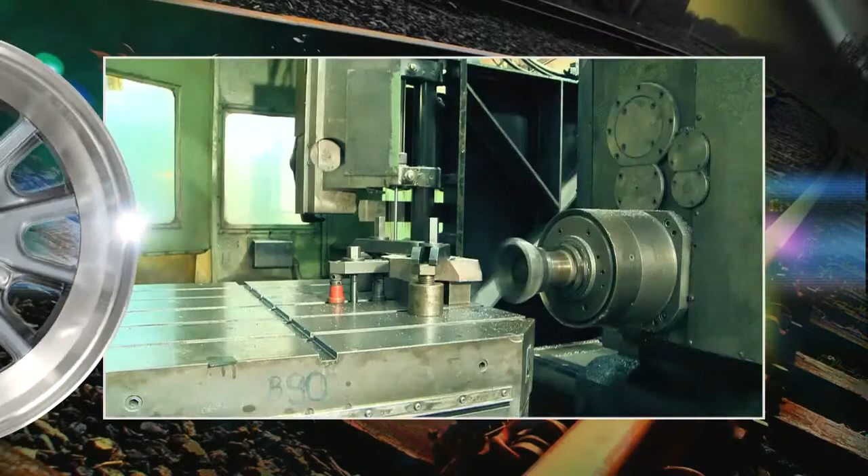SAN Engineering was started by Suri and Nair, two people who promoted the company. It started way back in the 1970s, initially manufacturing small locomotives, then gradually graduating into making larger locomotives.

We are one of the largest manufacturers of hydraulic locomotives in India, especially in the shunting range. We make up to 2,600 horsepower, producing diesel hydraulic and diesel electric locomotives.

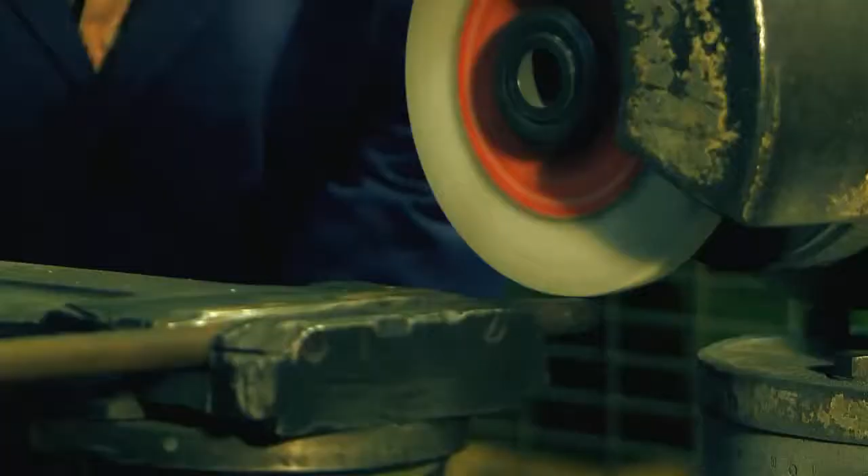We also have a gearbox division which makes gearboxes. Basically, engineering has been our strength, because a locomotive, though it looks robust and simple, actually has a lot of technology built into it.

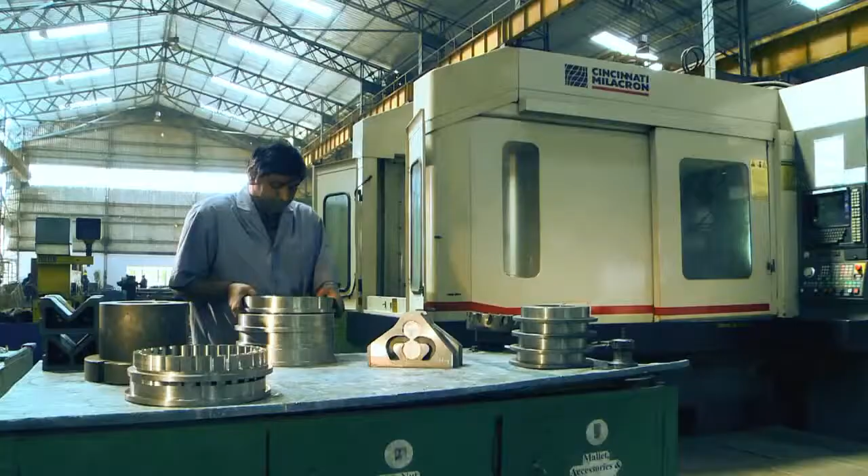SAN Engineering uses Siemens PLM software for the design part, which is then translated into manufacturing drawings. These drawings go through the process, and we have very good CNC machines for manufacturing the parts, which are then assembled. We have a very good quality system in place where the products are inspected before the locomotive is made.

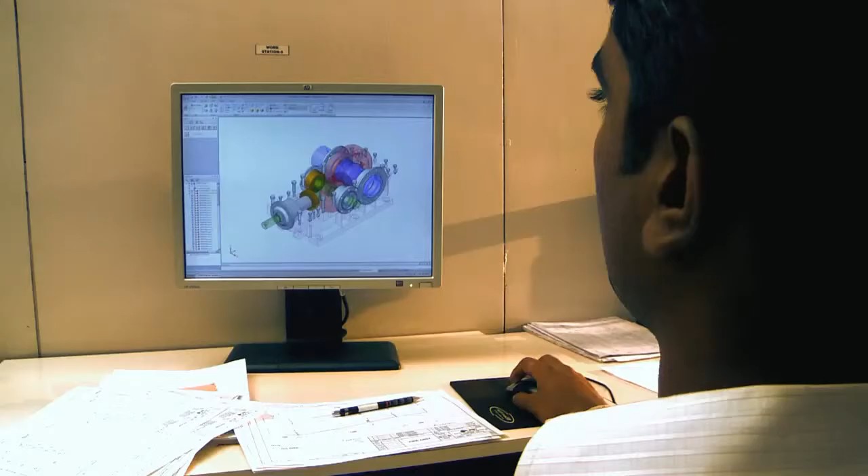At SAN Engineering we were on 2D for quite a long time, and we had issues like not being able to visualize the product or visualize where interferences were occurring. With that, we did an evaluation of many software options.

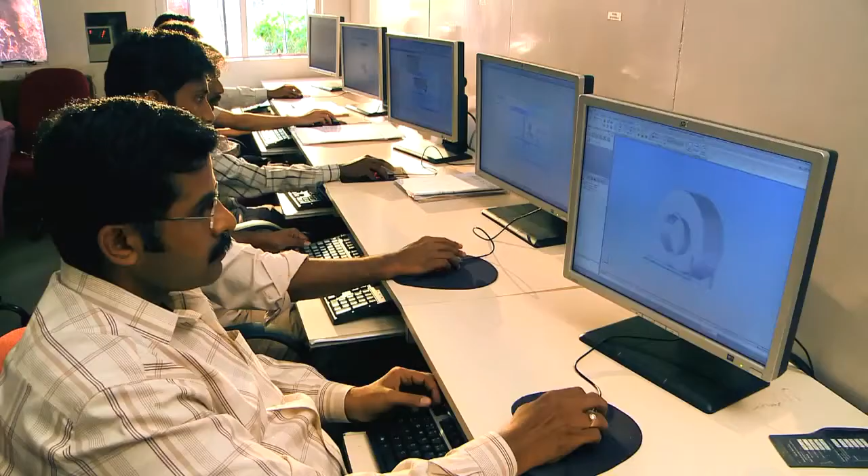We found Solid Edge has an edge because it has an integrated suite of software, which made us select it. The PLM software gives a great advantage to the designer—he is able to see the products, assemble them, and make sure he doesn't make any mistakes. So productivity is enhanced, manufacturing becomes easier, and it becomes a fit-and-forget assembly. We get a distinct advantage on the productivity side.

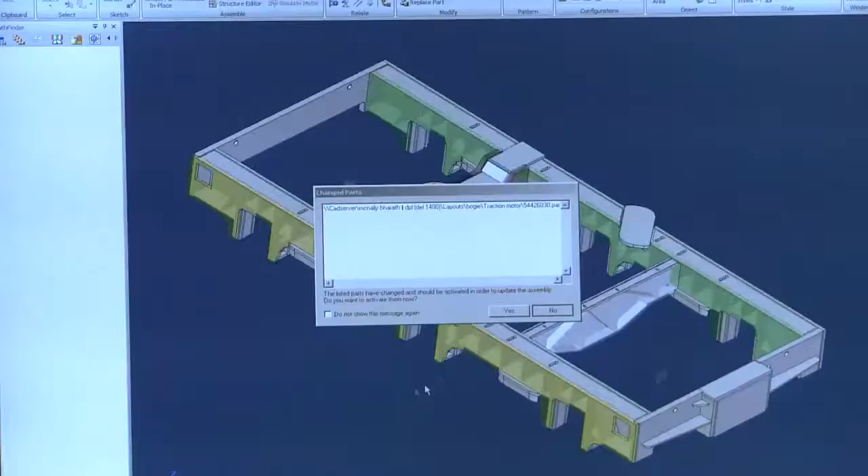We were initially trained by the reseller, for a brief period. We had to create standard templates and a standard design method, and now it's quite easy. All our engineers are well trained, and even newcomers learn hands-on.

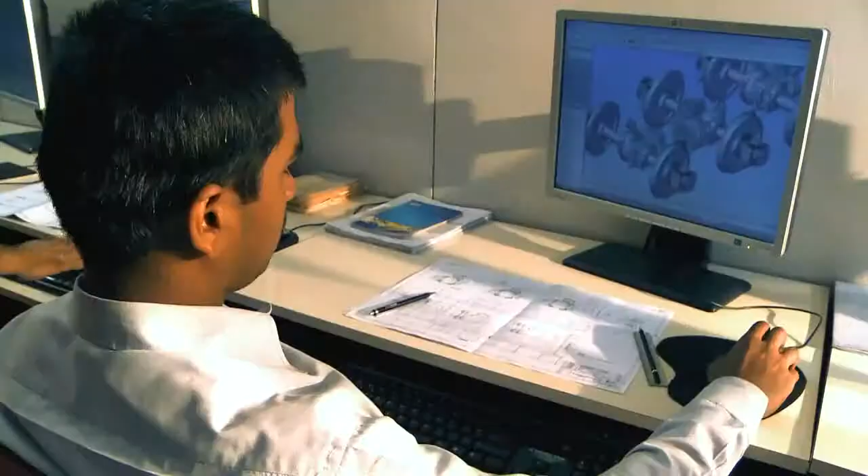Solid Edge synchronous technology today has adjustable parts and adjustable assemblies, and especially it has no history. This makes it much easier for revisions and modifications, which makes it ideal for designers.

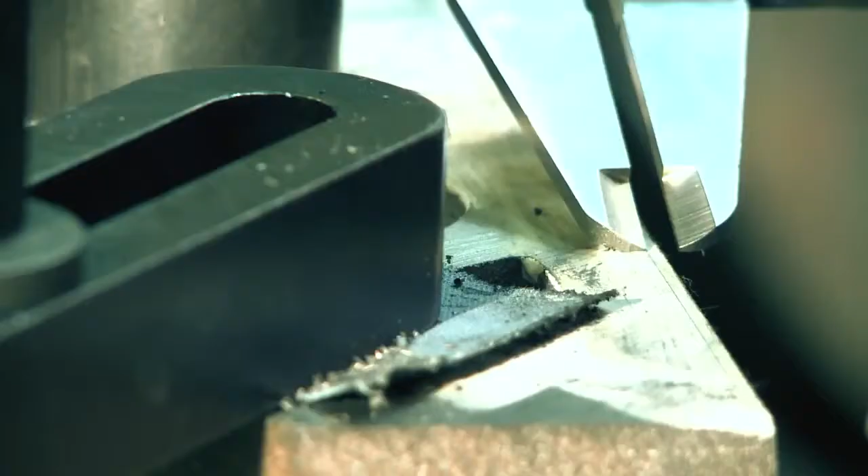With synchronous technology, we are able to position all the products in their right place. Then maintainability can be seen, and the reliability of the items can be seen much better than before. This makes our product much more reliable and maintainable.

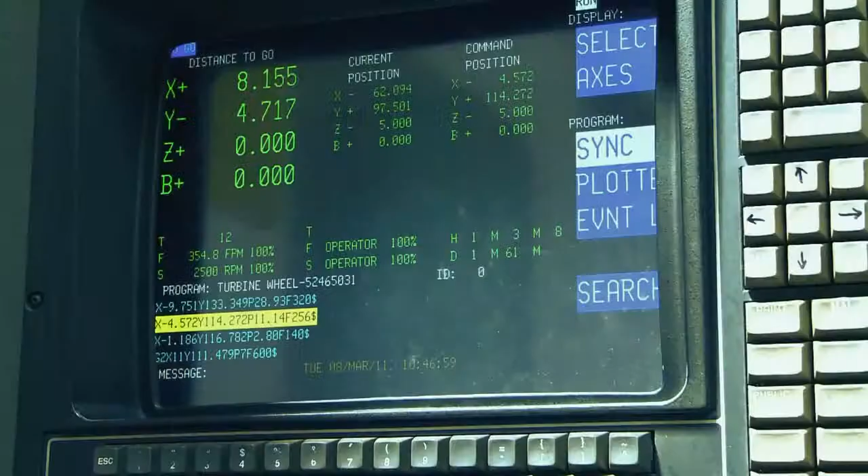I would say the reduction in time is almost 50% compared with traditional methods. When we use different translators, it's hard to modify, but synchronous technology is history-free—you can push and pull to make changes easily, which makes communication to the supplier easier so that what we want can be clearly communicated.

I would confidently say about 90% of our designs are done in Solid Edge synchronous technology. We have implemented Solid Edge, and I'm happy to say we've been using it since 2007 for all our designs. I would definitely suggest to all my colleagues and partners to use Solid Edge synchronous technology—it has much better features than the competitors, and it is much easier to learn and adapt to.